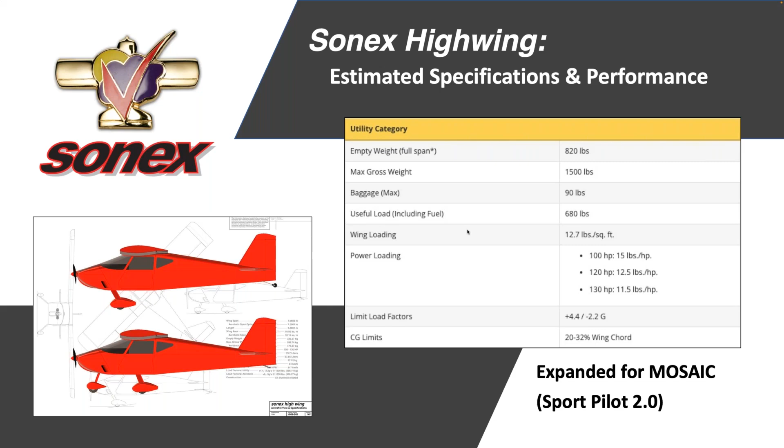Of course, it depends on how you have the airplane loaded in terms of passengers and fuel. But there are scenarios that allow you to do 90 pounds of baggage if you want, or a 40-pound BRS system and still have some capacity left over for baggage.

Now, when we talk about aerobatics, this is the first airplane that Sonex is offering that will be approved in the aerobatic category with 2 people on board. So all of the existing airplanes that we offer are utility category when flown with 2 people on board, above 950 pounds essentially for the Sonex and Waiex, and are aerobatic when you fly them solo, and of course within the more limited CG range that we limit aerobatics to.

So for the High Wing, especially if it's going to be built, and I say if, but we'd like to do it as a production airplane, as an SLSA, we wanted the airplane to be able to do aerobatics with 2 people, maybe serve a niche in terms of new aircraft availability in the training market, or something that flight schools can use to basically train pilots all the way up to CFI, including their spin training. And so this airplane can do aerobatics with 2 people.

We'll have 2 different wingtip options, and you can refer to our earlier webinars and updates to get more details about this. But basically for 2-place aerobatics, you're going to take our longer fiberglass wingtips, which are about 1.5 feet long each, actually less than that, and replace them with just some end plates that we'll have, which just go on easily with piano hinge. You can just pull the hinge pin with a pair of pliers and swap out the wingtips in a couple of minutes. Really easy to do.

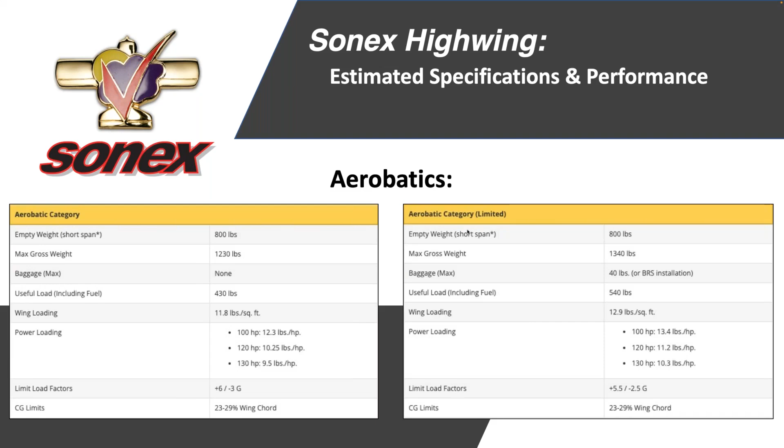capabilities of the structure. We do have a 2-inch wider cockpit, so the interior width of the high wing at the shoulders is 42 inches. The wingspan, of course, at its full span is 4.2 feet longer. We're 14.5 inches longer in length than the Sonex.

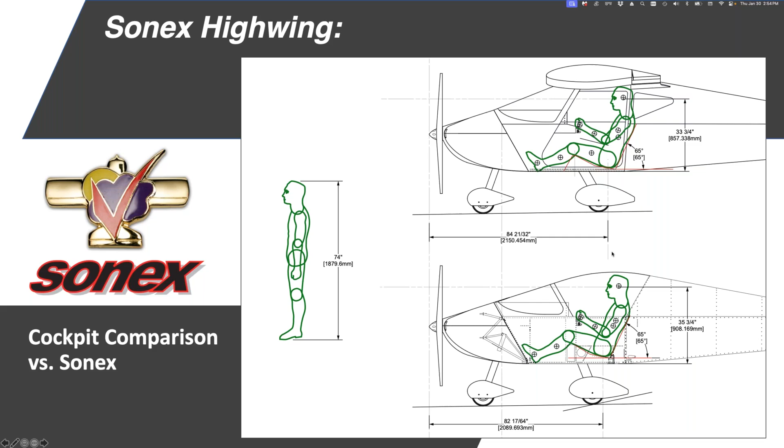And I'm sorry if I'm stumbling a little bit here. I have some webinar windows. I'm going to try to minimize these so I can actually read my captions better. Bear with me. There we go. Let me go back to that previous slide. Yeah, 14.5 inches longer. Now I can read it.

All right, and here's a cockpit comparison. And of course, we have our friend CADman in green. And you'll see that in the high wing, as I mentioned, the curved canopy can be a bit more restrictive in a low wing airplane versus the rectangular cabin in a high wing airplane. So that gives you a lot more headroom.

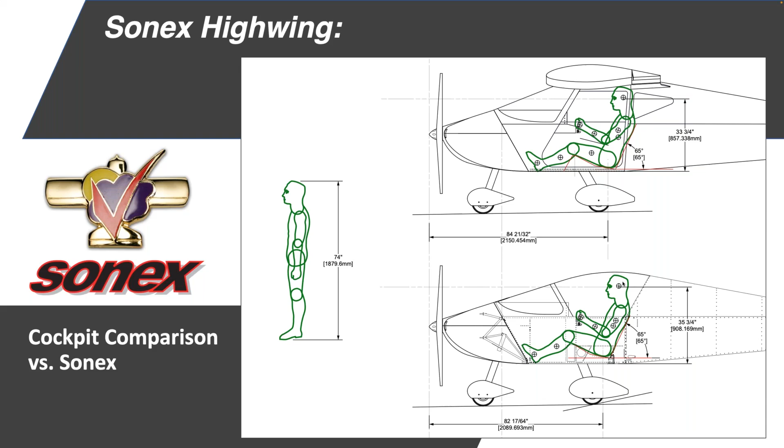We've been able to get the seat a little bit lower to the belly, which helps in terms of the amount of space that you have. Also, due to the layout of the aircraft and the longer tail and everything, the CG characteristics of the airplane, we've been able to move the wing and the pilot's seat approximately 2 inches further aft than the Sonex. So that gives you a little bit more leg room as well.

When it comes to the AeroVee and its 80 horsepower configuration, we're not 100% sure how that's going to fly yet. What we're basically going to be doing in test flight of this first prototype is graphing out RPM ranges agreed upon between UL Power and Sensenich, who makes our propellers, and chart out what RPMs on the 130 horsepower UL Power engine will best simulate these lower horsepower levels.

So we'll test at 80 horsepower, we'll test at 100 horsepower, in terms of climb performance I'm speaking of. And we'll just make sure that we feel that we have adequate climb performance at 80 horsepower. I'm confident that anything 100 horse and over will be just great in the airplane.

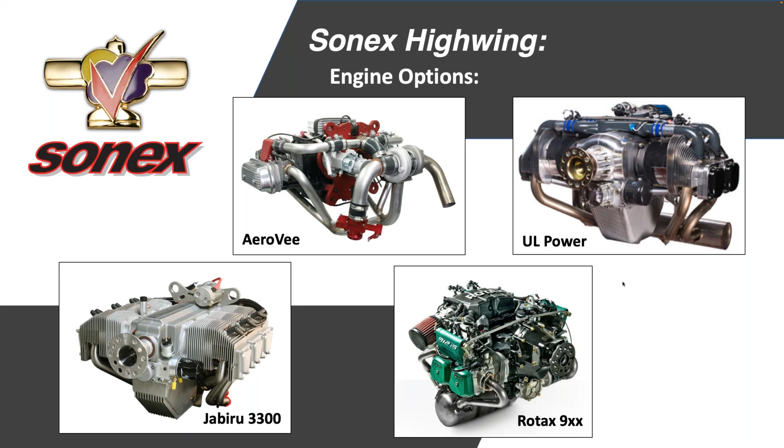And we sat, I couldn't even tell you how many people. I would say it's in the hundreds of people that tried on the high wing, of all shapes and sizes and all abilities in terms of mobility. And it was a great proving ground for everything that we wanted to do with the cockpit. And I would say it's done everything that we want in terms of that.

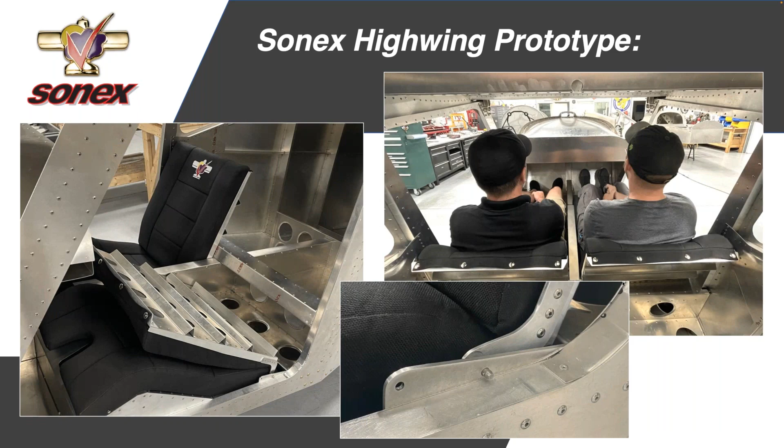And then here's a couple more pictures. For people maybe a little shorter than Paul, if you look in the lower left-hand side picture, you'll see that the seat back folds and you get a great look at the pretty large baggage compartment. But there in that detail picture on the bottom, we actually have two positions in which you can put the seat back and the hinging portion.

It's hard to see in the picture there, but it's just a quick release pin with the spring loaded ball on it for a retainer, with a little keychain loop on it, the part you can't see on the other side of the aluminum there. So it's easy to just pull that pin out, and there's a permanent pin on the other side of the seat that easily comes out of the slot, and you can move the seat 2 inches further forward, and that's what that front hole is there.

So if you're a bit smaller, you can still be able to be in this airplane and see over the instrument panel and be able to reach the rudder pedals. And we haven't built them yet, but we'll have the support on the seat back that braces to the cross tie so that you can vary the angle of the seat back, especially when you're in that front seat position hole.

And then on the right there, you can see Tony on the right and Chris on the left from our shop. Now, these are not the biggest guys either, and admittedly, they are both holding their inboard arms as if they're holding control sticks. So you can see they're honestly not touching shoulders in the airplane, nor are they sticking out the door. They're well within the airplane and not touching shoulders. So very roomy inside with that extra 2 inches of width.

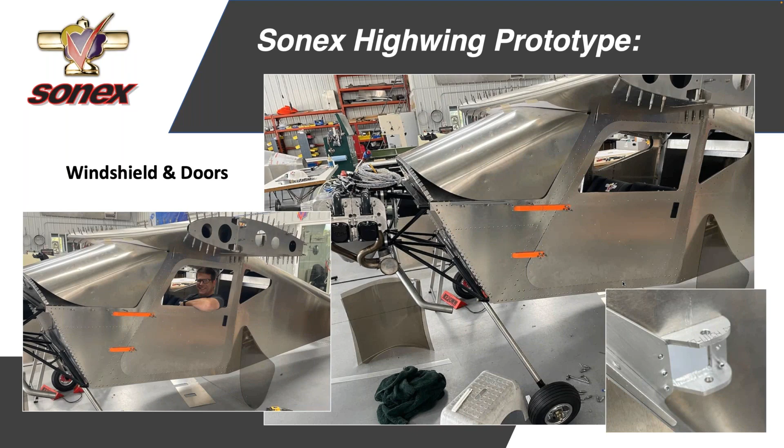All right, so let's get to some progress here. So here's some pictures. I'm just going to be showing you what we've been able to accomplish since AirVenture. Admittedly, at first blush, I get a little bit nervous about giving a presentation like this because it doesn't look like a lot, but there is a lot happening and there's a lot that we have done, and we are getting ever closer to finishing this prototype. We are working really hard to be able to fly this thing, hopefully in March or April. And I feel that we're on track to get there. So we'll see how it goes.

But you can see there, I put this picture on the right on the website as the preview for signing up for this webinar. We had some fun with people on social media, people commenting about the windshield, quote unquote. And, of course, this is just a mock-up. You see me sitting in the airplane there on the left, and we made a lot of Charles Lindbergh jokes when we had this mock-up on the airplane, and got a guy here that does a great Jimmy Stewart impression, so that was fun.

But basically, the point of this is to finalize the windshield shape. It's hard when you go from a CAD drawing to the physical world to finalize a shape like this and get the trim line just right. We wanted to establish the shape and determine what the tooling is going to need to be to make that windshield, which we are working on.

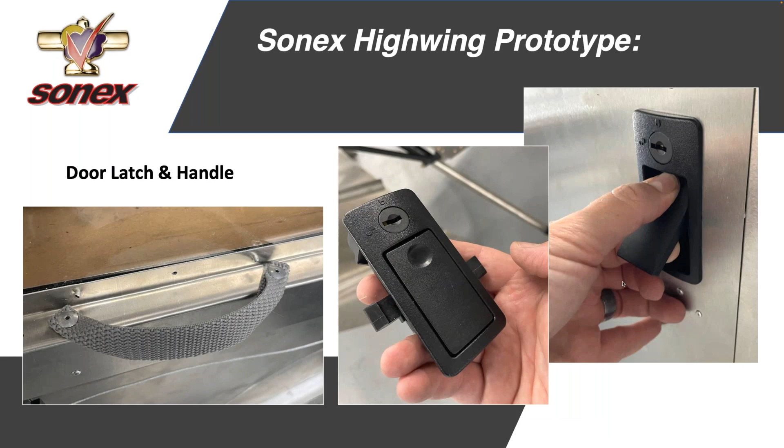Here's some details about the door. So just as far as a door handle on the inside, just a real simple piece of webbing for the handle. That way, your shoulder can brush up against it and you don't even know it's there. And it's convenient to grab it and close the door. And then the door latch itself. So you can see it's a nice little impact resistant plastic assembly. It's actually made by Southco, which many of you may be familiar with. They make a lot of the quarter turn fasteners and other things that we use on airplanes commonly. And they make this door handle.

Nice thing about it, it's super lightweight. It's flush, as you can see, when it's closed, so it's very low drag on the airplane. It's got two latches, what in the industry, as I've learned, they call a pawl, P-A-W-L. Anyway, the pieces that stick out the sides that actually catch the striker and hold the door closed. So it has two of them, and they're spring loaded to be closed.

And what we can do, I don't have a good picture of it here, but if you look at the picture on the left of the door handle, you'll see below it in the interior door structure a really small, just a 1/16 inch diameter steel cable. And so we can attach a cable to the pawl, to the latch, and we'll probably have another piece of webbing that's just sticking out of the trim panel that we'll have on the interior of the door to make it look nice. And you'll just be able to pull that piece of webbing and unlatch the door very easily. And it's super lightweight and very simple.

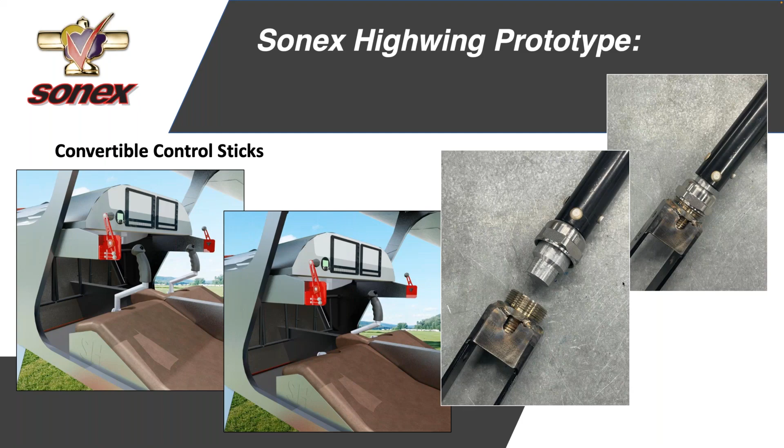And some more progress here. We've got some more of the control system done. So on the left there, you can see basically the aileron and elevator layout diagram. As I've covered in previous presentations and updates, basically the sticks will be tied into a torque tube in the center console, and there'll be a vertical push rod behind the aft wall of the baggage compartment, and then there's a top torque tube that goes out to the ailerons. So it's a nice way to do it. Of course, we wanted to stick with all push rod connections like we've always done, especially for an aerobatic airplane, again, avoiding possibility of flutter and free play in the system.

Now, we've done something that we're so far extremely happy with. Instead of having traditional pillow blocks for these two torque tubes we have in the aileron system, we're actually just using bolts and bronze bushings at the end of each torque tube. You can see it there in that middle picture on the right-hand side of the picture at the front of that torque tube. That works extremely well. It makes for a system that's extremely light and loose, while still very tight in terms of not having free play. And you can see on the picture there on the right, sort of above the ceiling of the cockpit. We don't have that center wing skin final riveted yet.

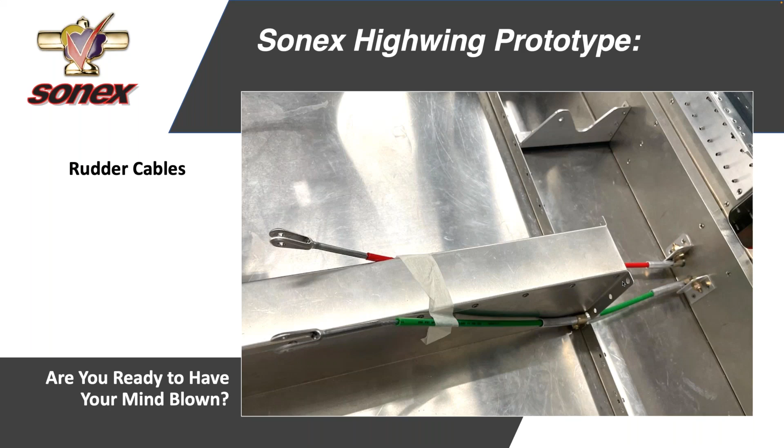And rudder cables. We have rudder cables in the airplane. And as you can see here, the rudder cables, what you're seeing is the center tunnel. Now, the sort of open bracketry that you see there on the right-hand side of the picture is where the stick frame mounts, and there's a cover that goes over it. It's basically at the very front of the seat, sort of under your knees. And so the torque tube for the aileron, the push rod for the elevator, and the rudder cables all go

through the center tunnel. And traditionally what we've done is the rudder cables have gone down the fuselage sidewalls and attached to the rudder pedals on the outboard extremes of the rudder pedals. And in doing that, you've got the right rudder cable attached to the extreme right rudder pedal and the left rudder cable attached to the extreme left rudder pedal. In this case, we're attaching the rudder cables to the two inboard rudder pedals. In other words, the pilot side's right rudder and the passenger side's left rudder.

And bear with me here, a little bit of a thought exercise. In that situation, the rudder cables have to cross each other in the fuselage to not be reversed. So one of the things that we wanted to do in this airplane, because although we have covers that are removable, we wanted to reduce, of course, the complexity and the expense of the aircraft. And phenolic pulleys from Aircraft Spruce are very expensive, so we wanted to avoid those wherever we could.

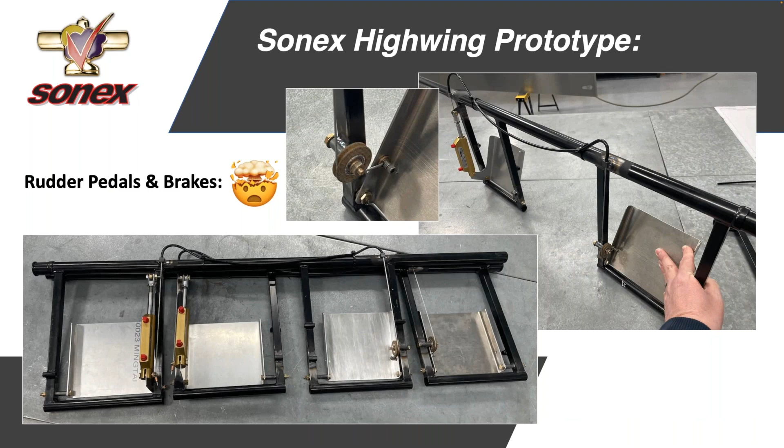You see, I have a note there. Are you ready to have your mind blown? So if you know Sonex, this might blow your mind. There it is. So we've always very strenuously resisted toe brakes. So if you know anything about Sonex and our design philosophy, we've always avoided it and recommended against it. And there's reasons for that.

We have direct steering, so we don't steer with brakes traditionally. We have a direct push rod to our tail wheel, no springs in the system, makes for a much easier tail wheel system to handle. And in our tri-gears, we have steerable nose gears. And we still have that. We have not changed that.

But with this high wing design, with the big doors and wanting to have the two different stick options, dual throttles is something we can easily work out and make work. But what we were having trouble with, what was kind of blowing our minds in terms of doing it in a quality way, we looked at a few different concepts, was how to have our traditional hand lever, brake lever, and not have it just get in the way or be really awkward or be like a torque tube system that's really heavy.

Knowing that people through the years, we do things a very special way, unique way at Sonex to be true to the mission of the airplane. It's not always what the builder wants necessarily. So people through the years have done their own toe brake installations on Sonexes. As you can see, the rudder pedals hang down from the top, just like a Vans RV. Doing a toe brake is not difficult to do.

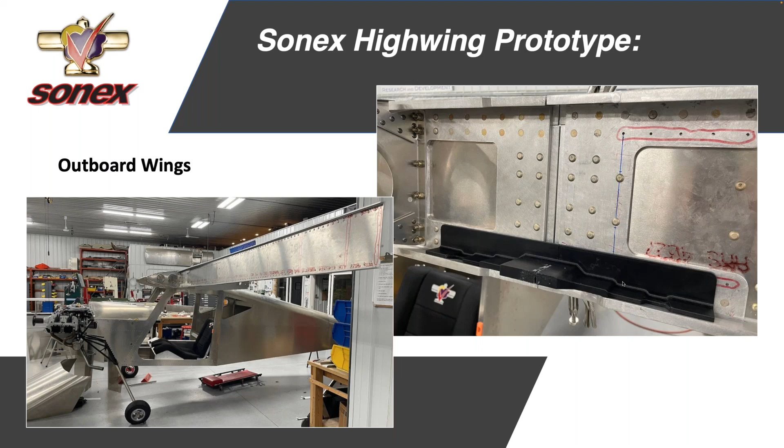All those steps that you see there are the different bolt locations. And again, there are different thicknesses to ensure that all of the bolts are loaded evenly. And what it avoids is failing the first bolt in line and then the next one in line, and all the bolts break like a zipper. So this is very important for joining a wing like this.

So just a fit check there on that, kind of a geeky engineering side note there in terms of the wing ties and how they work. And then you can see on the left there, and this picture was actually taken this week, we've got all the ribs done and the rear spars, and of course the main spars have been done for a while, and we're framing out the outboard wings.

And you can see there we did another test fit. You kind of get an idea of the wingspan there on one side, and we'll be starting to skin the outboard wings here in the next couple of weeks. So really exciting stuff there.

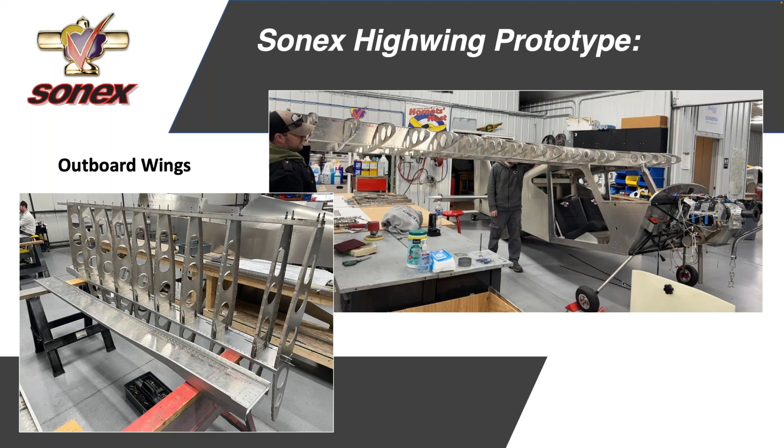And as a result, these tail tips have installed on this high wing prototype easier than any tail tips we've ever had before. So I think that's going to be a real benefit to making the kit even easier to build.

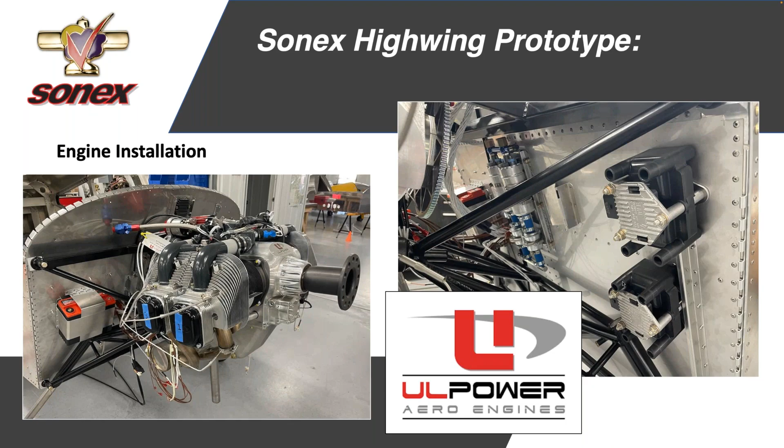Engine installation has begun. The engine's been hung on the firewall for a while now, just sitting there, not doing anything but being a counterweight. But in the last few weeks, we've started actually hanging items on the firewall. Of course, we're using the UL350 iS on this airplane as a prototype, and thanks to UL Power for all the great support that they've given us for this.

And you can see in the picture on the right, and actually on the left as well, we've got things going on the firewall. You can see the battery box there. In the picture on the right in the middle of the firewall, you can see the fuel pump assembly. Next to that, you'll see a bracket that will hold the fine filter for the fuel injected system. And on the far right there, you see the ignition coils.

You'll notice there below the top ignition coil, a stiffener for the firewall. I'll admit, we've unstrategically added stiffeners on the firewall as we've mounted these components. For the next prototype and obviously for kits and installation packages, we'll be more strategic about where these stiffeners are located for the final package.

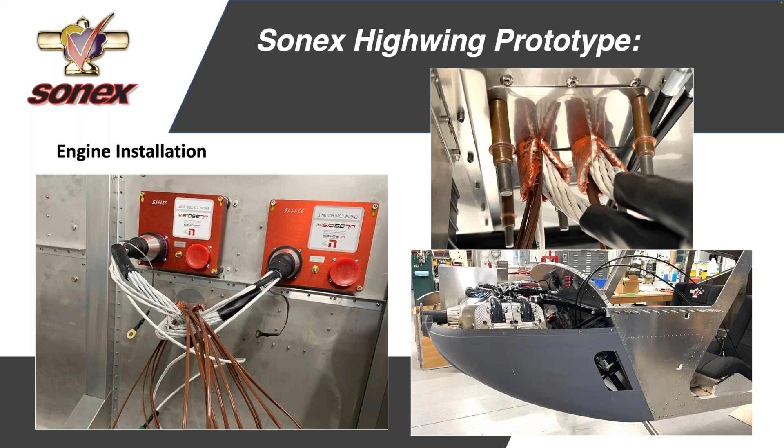And on the back side of the firewall in the left there, you can see the ECUs. We are doing the ASTM compliant version of the engine, which has the dual ECUs. Important if we're going to get ASTM certified to do ELSA and SLSA aircraft. They're on the pilot side of the firewall because they do need to be kept cool. For reference, these are mounted just under the 20-gallon fuel tank. So you will be able to reach them, but they're up out of the way of the rudder pedals, and the wire harnesses are out of the way of the pedals as well.

The brown wires that you see there are just sloppily thrown in there. They're passing through the firewall, but the cabin side isn't routed yet. Those are the EGT and CHT probe wires. And you can see the big circle in the firewall in the picture on the left. And then in the upper right there, you can see the stainless cover, if you will, for the cable pass-throughs.

Now, UL Power gives you all of these harnesses with these very big Cannon plugs pre-wired. So you obviously don't want to undo any of that wiring. And they don't make bulkhead connections for the firewall with an extra wiring harness, which would be a lot of wire and a lot of extra weight. So we just cut a hole big enough to pass the two Cannon plugs through.

And we made this two-piece cover plate out of stainless. And you can see there we've got some fire sleeve that's treated in RTV. We do have to split it down the middle to make a seam in order, again, to get around the pre-wired harness.

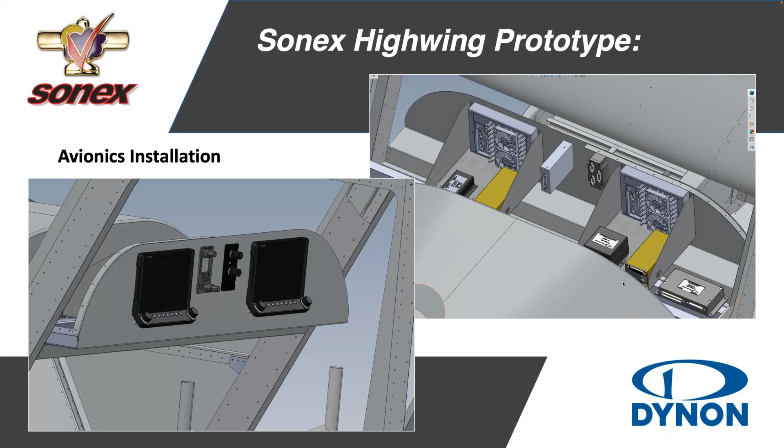So it's really a great improvement, I feel, in the Dynon system for getting all of the accessories installed in a nice, tidy way with as low of a weight as possible. So we're excited to get that installation. Dave is actually going to be coming out to our facility, I think in late February, helping us to install this system. And that's when things will start getting really exciting in terms of finishing this airplane up and getting ready to fly it.

All right, so what's next? Obviously we have to complete the outboard wings. That's in process. Complete installation of the controls. We have a machined aluminum bell crank at the front of the aileron torque tube in the center console that we have to get from our machinist yet. A couple more push rods from the welder that we have to get yet, and we'll get all of that controls installation completed. Obviously finalize those stick assemblies that I showed you.

We have to complete the firewall forward installation, which is well on the way. Avionics installation, the last 10% that takes 90% of the time, right? All the detail stuff. And then the cowling installation, windows and the doors and skylights and everything, and all of our fairings, our push rod and cable fairings, the fairings at the root of the wing, at the trailing edge of the wing, which I didn't talk about here, but we are working on.

So our goal for first flight, I know this is dangerous, the answer should be Tuesday, right? Well, you don't say what Tuesday. I'm going to say March or April. And although I didn't print it here, I'm saying March or April 2025. So we really want to get this flying as early as we can this spring and get this airplane out there to people. It's really in demand, it seems like.

Deposits. A lot of people have asked me about kit reservation deposits, which we haven't started accepting yet. Breaking news, we are going to start accepting $500 reservation deposits to get yourself in line. It helps us tremendously in terms of planning inventory and that sort of thing. Look for that maybe next week, probably when we publish a website version of this update and the archive video of this webinar.